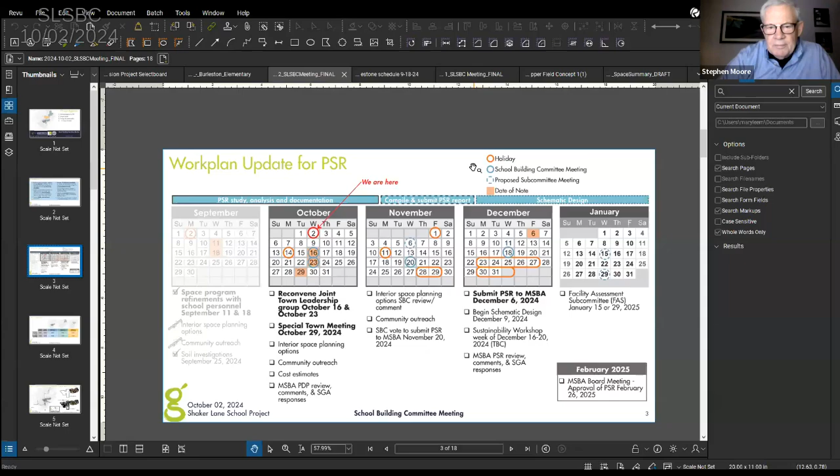You've got holiday, school building committee, proposed subcommittee. You've got holiday indicated as a red circle, and a lot of red circles out here, and I don't quite understand what that means. Those are school holidays, right? Yeah, Indigenous Peoples Day, Columbus Day, I can't remember what this one is. I think that's Diwali. Then there's Veterans Day, Thanksgiving, holiday break. Okay, got it.

Okay, so yes, Meryl is right. The meeting on the 16th we will be showing design updates, and by the 23rd we will have updated cost estimate information. That's why we have the 2 meetings right in a row there. Any other comments on this before we move on?

All right, so as a comparison in terms of size, last time we met we talked about the space reduction efforts we had been going through, and we've gotten the new construction option down to just over 97,000. We anticipate that is going to continue to shrink a little bit as we develop the designs. The add reno option is a little bit smaller. The reason for that is that in the new construction areas, the additions are all sized to be the ideal sizes, same as the sizes being used in the new construction options.

But in the portion of the building that we are keeping, we are making the best of the existing spaces, trying to shift things around, moving interior partitions where we can. But because we're limited by the existing footprint and structure, some of the spaces inside this part are a little bit undersized. That's one of the reasons we had talked about this not being our absolute top choice. It didn't get the top score when we did the evaluation criteria, because some parts of it were going to be tough to meet the MSBA guidelines and the district's ed plan.

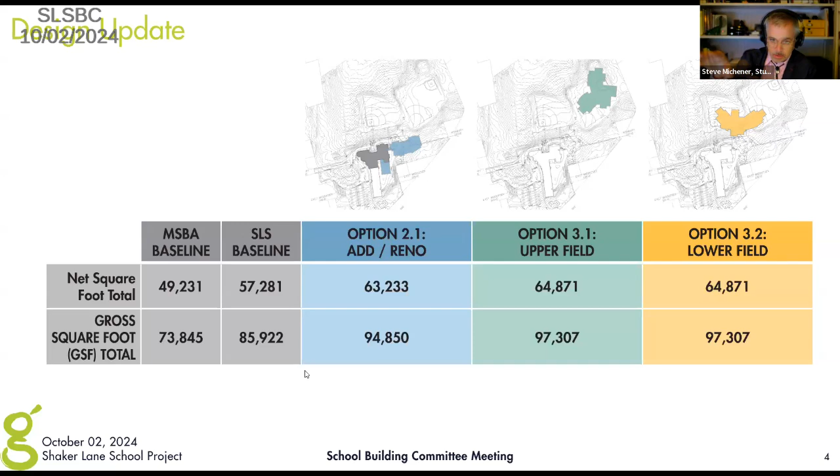Just a quick question, Mary Lee. I wonder if it makes sense, if this is the slide that goes into the presentation for the 16th, to add the previous score, just to show what was preferred before. Even with this baseline of 85,000, the last square footage that most people saw, when we had all the folks in there, was 103. We should reference that to show the work being done, that it's actually coming down from that.

That's a good point. And Mary Lee, just a point of clarification: the 85,922 square feet is the current Shaker Lane square footage with special education and pre-K.

Is that correct? Close. This would be if we took the MSBA baseline, which does not include any square footage for pre-K or your district's specialty special ed spaces, and added just those program pieces. This would be the absolute bare minimum the school could be and still meet MSBA guidelines and your program requirements. So previously we'd been comparing it to the 73,000 number, but that was never realistic because it didn't include pre-K or crucial special ed spaces. So really we should be comparing to this almost 86,000 square foot number.

And that's important to reinforce at our next meeting as well, because I think people walked away with the 73,845 square feet number. Yeah, that's a good point. We should probably emphasize that as well.

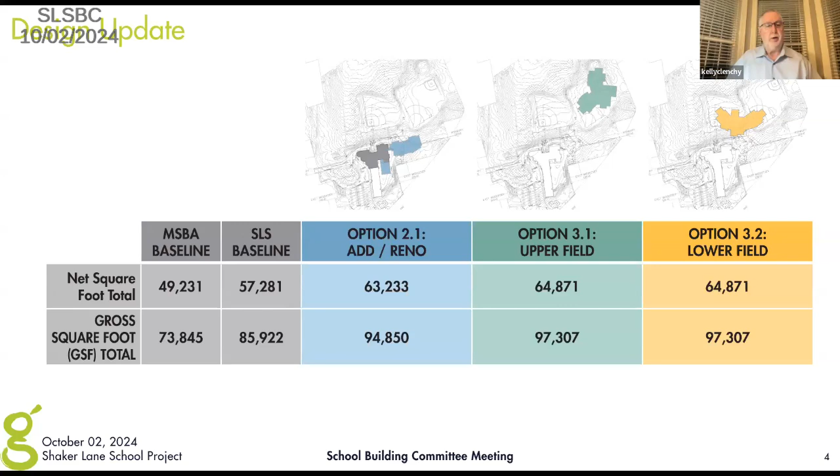Thank you. Okay, anything else?

Okie dokie. So we have been quite busy developing actual floor plans for these options. These are still very conceptual floor plans, making sure we have all the spaces included, that we're meeting the square footage we're aiming for, meeting the grossing factor, and using this to capture scope in the estimates.

So we have not done individual labels on the plans - that's intentional. We also have not carved up some of the larger spaces like the admin spaces, which will be subdivided into offices and conference rooms. There's a few other program pieces like that, for now just put in as a block, to be subdivided later during schematic design once we have an option chosen. This is more about space planning and laying out early floor plan options.

On each of these, we have identified the division between the community wing and the more private academic wing. In this add-reno option, because of where the gymnasium is and the layout of the existing structure, that line is pretty far back here. We could definitely add something like a security door to move that boundary up a little bit.

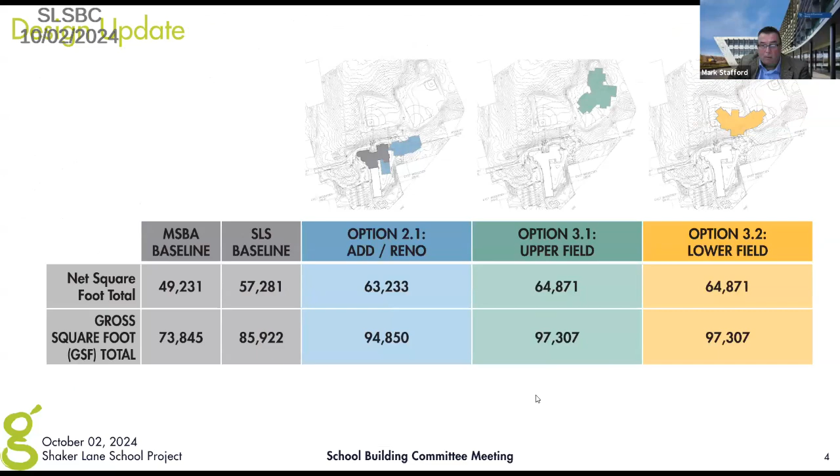You mean? Nope, over here. Yes, over here, yeah. Yes, definitely.

So what do these different scenarios mean as far as schedule and cost are concerned? So cost, we don't know until we get the next round of estimates. And scheduling, I don't know off the top of my head.

Mark, I think we had sort of talked about this. This one, the scheduling would be a little more complicated because it involves moving people into the new portion of the building while it's still being worked on, whereas the new construction option is built completely independently of the existing school and then it's demolished. But I think in general we've thought about the phasing of this so the schedule is still pretty tight on this one.

Mark, do you have any other? I've been involved in some of these add-reno projects, and there's quite a bit of coordination and scheduling impacts and associated costs.

I think that'll flush itself out, Steve, when we get the cost estimates pulled together. There'll be some kind of premium to pay for - we talked earlier about the total upgrade, that there'd be modulars or something, which I don't think we need to do here. But when the cost estimate flushes out, we'll be able to definitely talk about that.

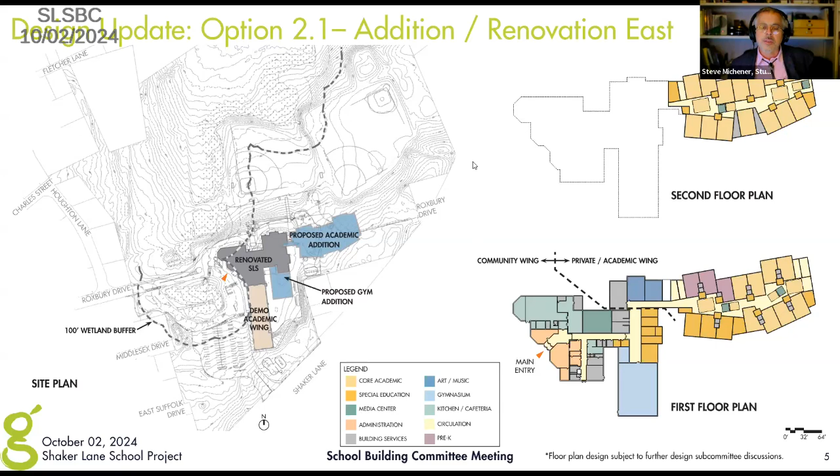Let's go, moving along, next option. Actually, I'm going to go in a different order. I'm going to talk about the upper field option first before I go to the lower field option.

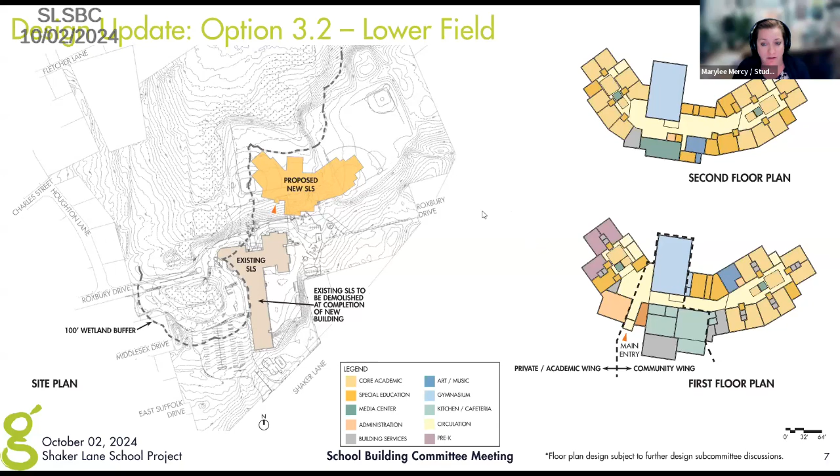All right, so the lower field option here - this is the one that had the highest score when we did our evaluation criteria. In this one, the main entrance is here to the south. There would be separate loops for car and bus, as well as parking spaces. I took a quick glance at the landscape architect's parking plan, and they had well over 100 parking spaces, so there's enough room for the parking spaces that are needed.

This is also a 2-story option, and this, I think, has the most tightly controlled access to after-hours community events. So you come in, there's a lobby, and then right here is the cafeteria and the gymnasium. The media center is here, so this could potentially be included in the after-hours access, but the rest of the school could be easily closed off and kept separate and safe.

This one, because the community-accessible parts are towards the south, right here, then everything from here, including this field and down the rest of the site, would be available for community use, which is a huge plus for the town of Littleton.

And this is the one that we've been focusing most of our design on, but we're going to pull up the level of the other two designs before it goes out for pricing.

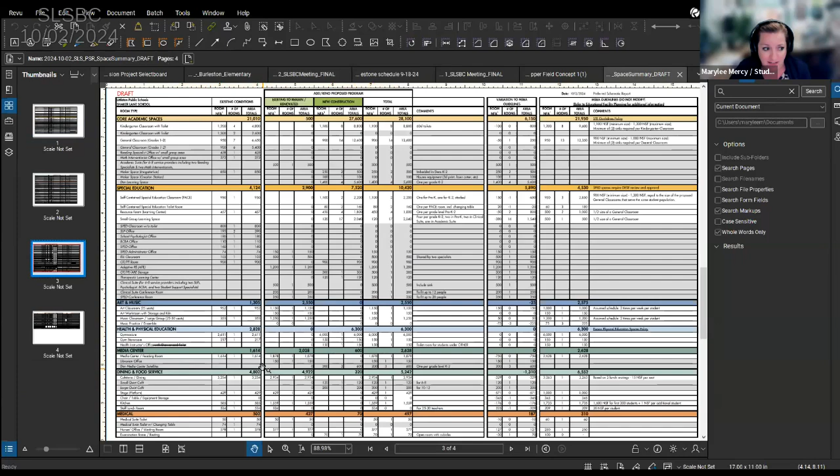And a standard size gymnasium is 6,000 square feet. Thank you, that's a big difference.

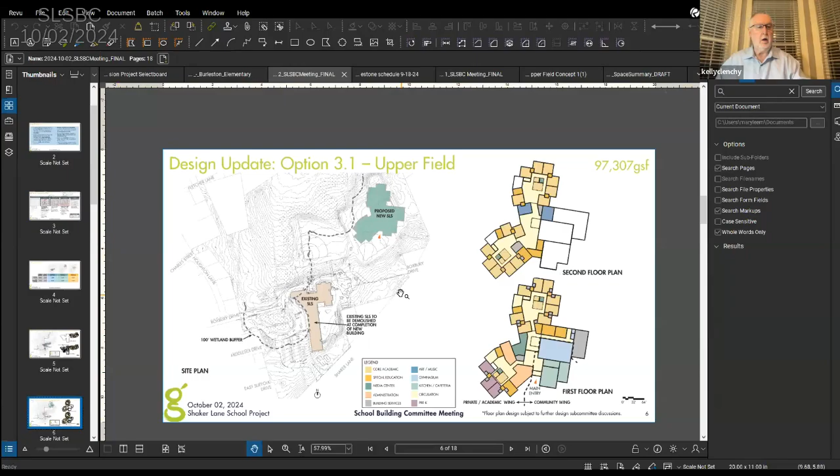Yeah, you're exactly right. The amount of site work doesn't change. It's the HVAC and stuff like that that's minimal.

So we will be having further conversations with our cost estimator to see if we can get a better calculation of how, if we continue to squeeze the program and make it more efficient, we can have a better idea of how that impacts the cost of the project without having to continually go back to the estimator.

But that's where I turn it over to the school department and the school committee. When you're squeezing down the square footage, what is the value of that? Are you getting value for the savings?

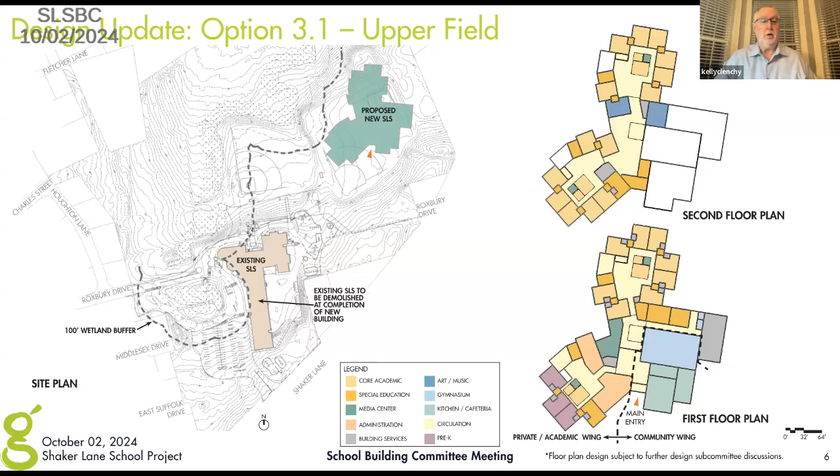So I just wanted to go back to the cost thing. Two things to point out: these are the three designs going to our Studio G design team cost estimator next week on the 9th. As well, we're going to have two cost estimates, so that's really helpful to level the information. It's also going to go to Mark's team, Turner & Townsend Heery. So we're going to have two cost information going next Wednesday, two cost estimators, essentially what you're seeing with additional information, very, very, very high level.

We're still very high level in a lot of this. We're getting the estimates back on the 22nd, so we won't have it for the 16th. Just wanted to clarify that. Hopefully we'll be able to sync up and reconcile with Turner Townsend and our estimator to level the two estimates against each other and make sure the assumptions are the same. So that's one point I wanted to make.

The second point is we're talking about square footage being a lever to reduce cost. But we haven't picked mechanical systems, site descriptions, or materiality at this point. So yes, square footage is one lever to reduce cost, but there are other things we haven't even identified yet that will teeter one way or the other depending on the information. Just wanted to put that out there - if we take a certain square footage, we're going to save this much, but there's a lot we haven't figured out yet. That's typical at this point in feasibility, and I wanted to explain the level of detail of where we're at.

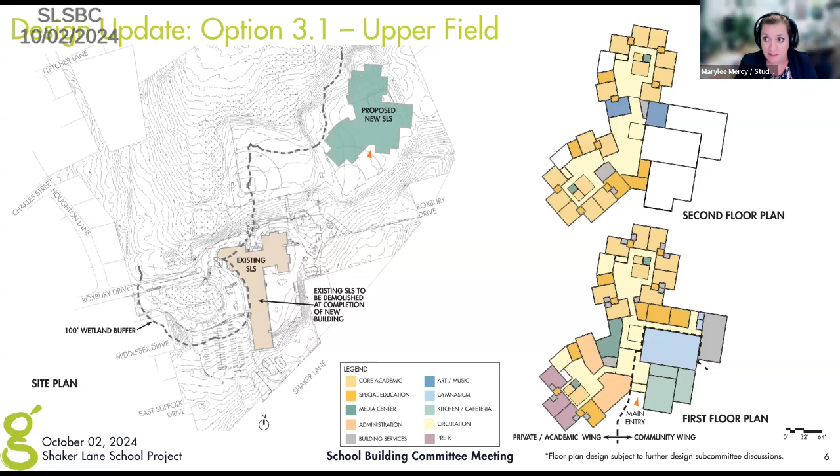All right, it's almost 7:40. Can we get to the sustainability stuff please? I'm going to run us through very quickly. All right, let's go to the next slide.

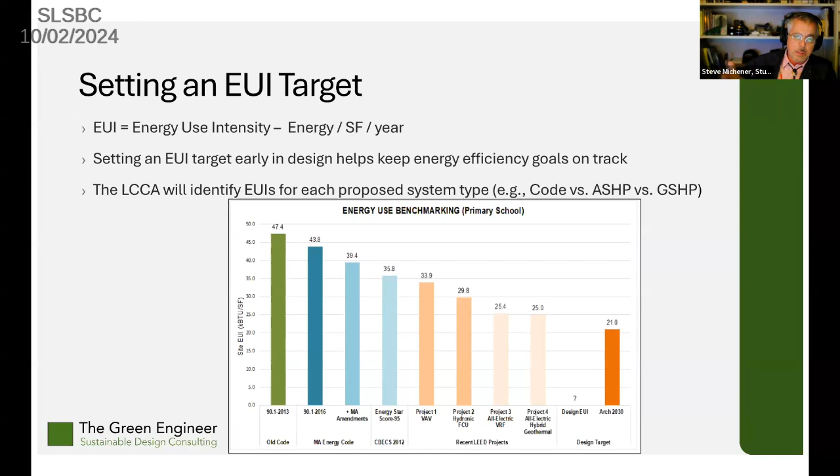It becomes pretty detailed in here, and that's where the district is actually going to come in to be a partner in this. We'll be having a sustainability workshop in December, probably late or mid-December, with the green engineer, consultants, and also those selected from the district who want to participate. We'd expect it's probably going to be one of the people from the sustainability committee in the town, and I believe this is an opportunity to have a subcommittee for the school building committee to have participation from the district, because there are many choices on how to achieve LEED certification, and it really starts to become choices for the district.

What's the right fit for the district? So that's what we want people to start thinking about, who will be part of that, because mid-December is going to be here before we know it, and we want those individuals identified so they can participate in this process.